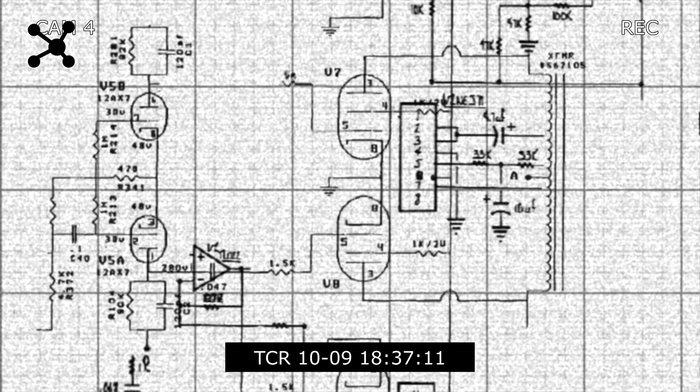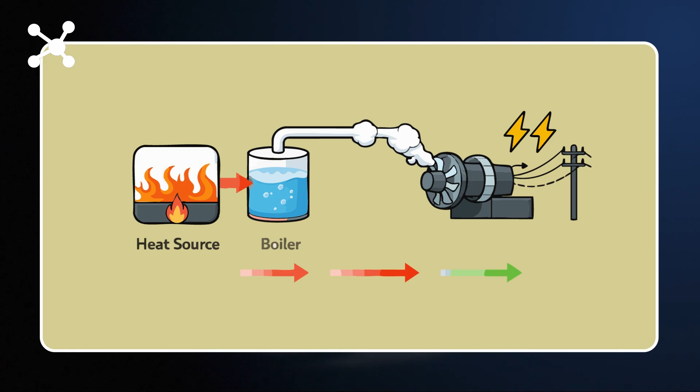At first glance, nuclear reactors seem complex and intimidating, but when you strip away the myths, a reactor is not an explosive device. It's a carefully engineered heat source. Its job is simple: produce heat in a controlled way, then use that heat to generate electricity.

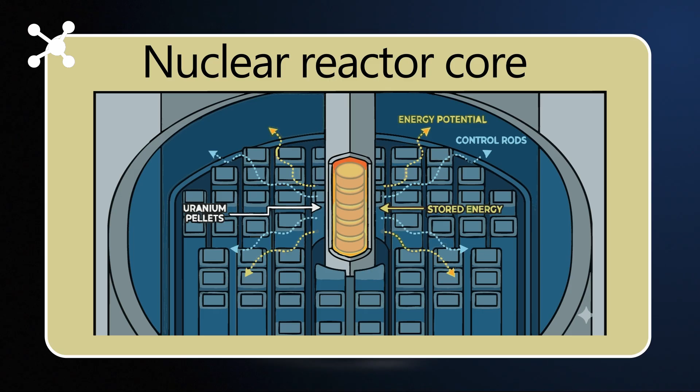Everything begins inside the reactor core. This is where fuel rods are arranged in a precise geometric pattern. Inside those rods are uranium pellets, small, solid cylinders that store enormous amounts of energy.

Uranium atoms are naturally unstable. When a neutron hits one of these atoms, the atom splits. This process is called nuclear fission. Fission releases three things at once: heat, radiation, and additional neutrons. Those new neutrons move outward and strike other uranium atoms, causing them to split as well.

This creates a chain reaction, but not the kind you might expect. Unlike a nuclear bomb, a reactor is designed to slow the reaction down. The goal is steady energy, not sudden release.

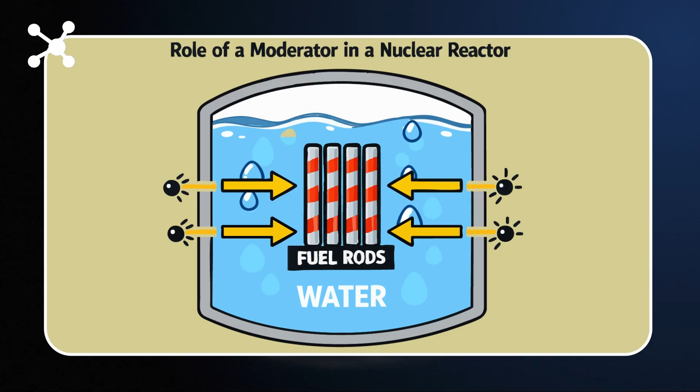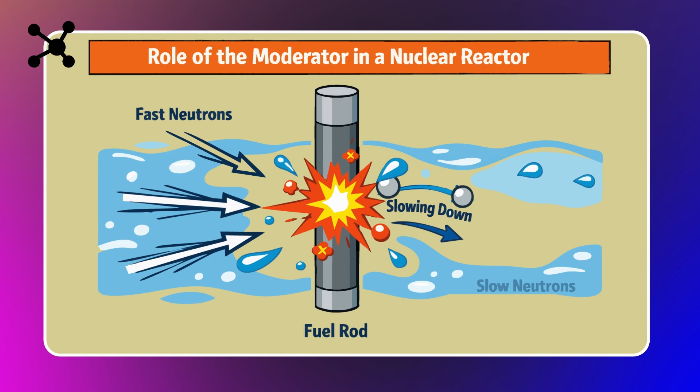This is where the moderator comes in. In most reactors, ordinary water plays this role. Neutrons released during fission are extremely fast, and fast neutrons are actually less effective at causing further fission. Water slows them down just enough to keep the reaction efficient and predictable.

Without a moderator, the chain reaction would fade. With too little control, it would accelerate. Balance is everything. Control doesn't stop there.

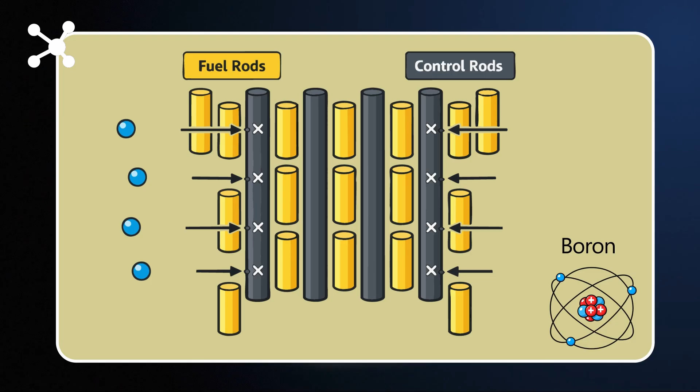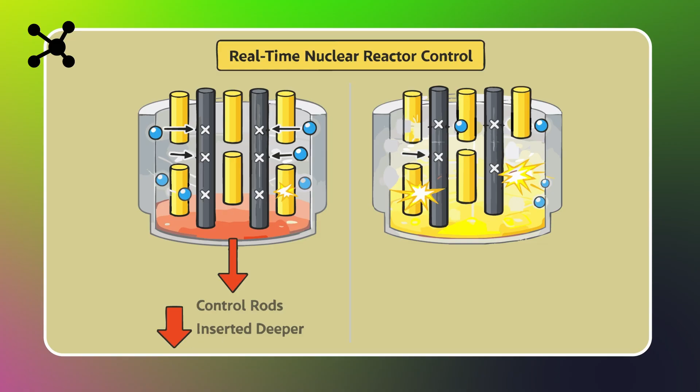Between the fuel rods are control rods made from materials like boron that absorb neutrons. By inserting or withdrawing these rods, operators can fine-tune the reaction in real time. Insert them deeper and power decreases. Pull them out slightly and power increases. This allows reactors to respond smoothly to changes in electricity demand.

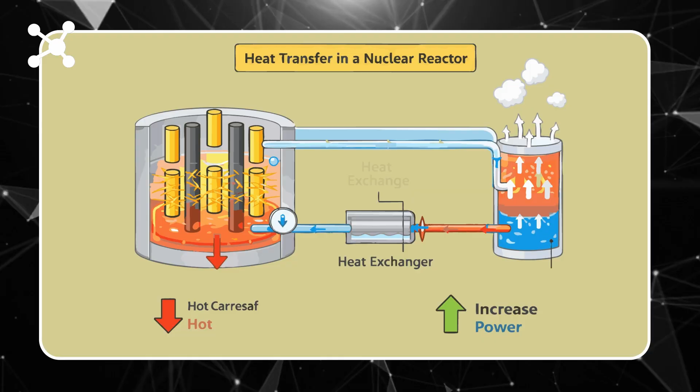As fission continues, the reactor core heats up. This heat is transferred to water circulating through the system. In many reactor designs, this water is kept under extreme pressure so it does not boil. Instead, it carries heat to a secondary loop where steam is produced.

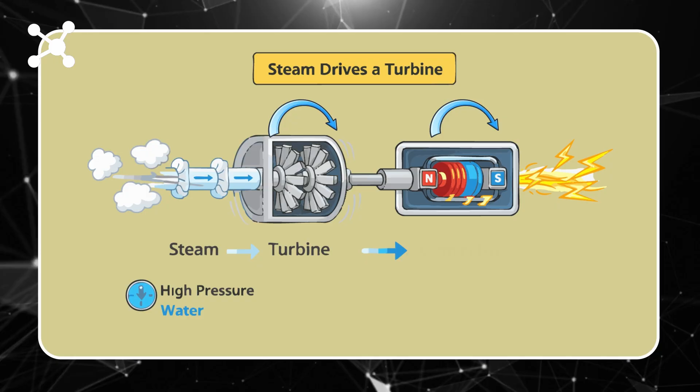That steam is what drives the turbine, a massive rotating structure connected to a generator. As the turbine spins, the generator converts mechanical motion into electrical energy. From this point on, nuclear electricity looks identical to electricity from coal, gas, or wind. The power grid doesn't care where electrons come from, only that they arrive.

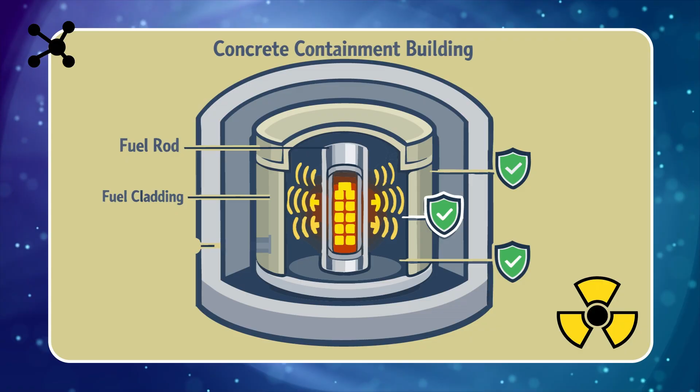One of the most misunderstood aspects of nuclear reactors is radiation safety. The radioactive material is confined inside multiple protective barriers: fuel cladding, a steel pressure vessel, and a thick concrete containment structure. The steam that spins the turbine never touches radioactive fuel. It comes from a separate, clean water system.

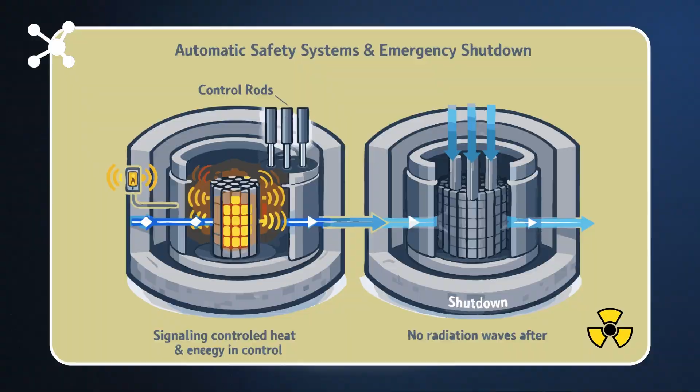Reactors are also built with layers of automatic safety. If abnormal conditions are detected, control rods drop into the core instantly, stopping the chain reaction. This rapid shutdown is known as a scram. Even after shutdown, cooling systems continue removing residual heat to keep the reactor stable.

Modern reactor designs go further. Many rely on passive safety, using gravity, natural water circulation, and physics itself, not computers or human input, to maintain safety during emergencies. So why use nuclear reactors at all?

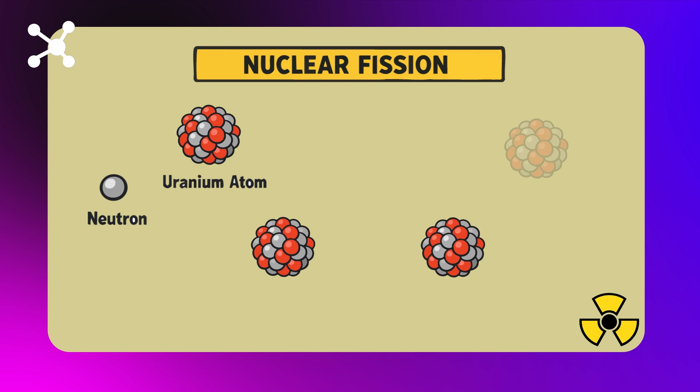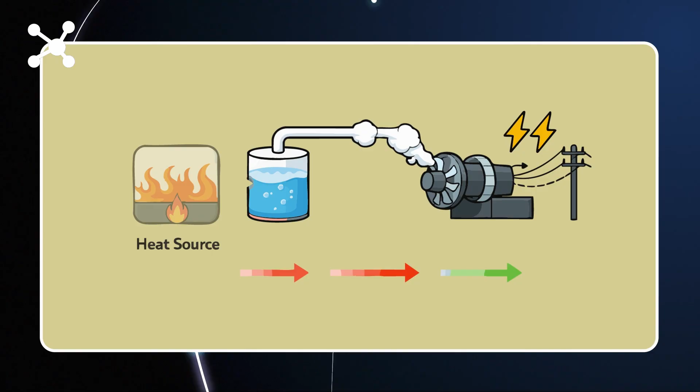Because they deliver immense energy from very little fuel, operate continuously for years, and produce electricity without carbon emissions during operation. A nuclear reactor is not a mystery box or a ticking bomb. It is a machine built around precision, balance, and control. One that turns the energy locked inside atoms into something remarkably ordinary: electricity.